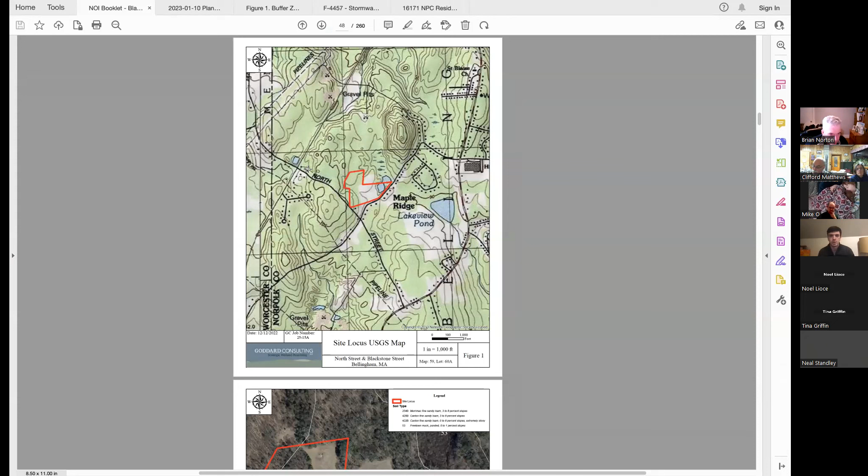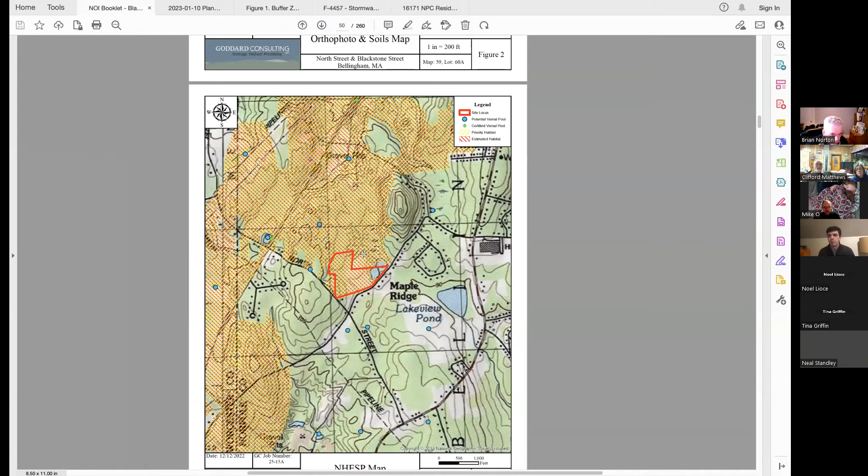Okay, can everybody see this okay? We can. All right, perfect. So just a little background: this is a locus map of the area. Blackstone Street here and North Street going this way. You can see on this ortho photo that a majority of the land, or approximately half, is agricultural land, and another portion is forested. Over in this eastern corner there's a BVW wetland. And as stated before, the whole site, or majority of the site, is located in priority and estimated habitat for rare species.

So I'll go to the plan set here. Let me just go up a few pages to the title. So this is the whole plan set. The plan is for the site to be split into two lots. As you can see, there's this southern lot, lot 1, where the development will take place, and then this northern piece comes over and covers this wetland as well, which is about 12.6 acres. That's going to be a conservation restriction as part of the conservation management permit for the rare species. If I'm not mistaken, in the previous project a couple years ago, when this was proposed as 4 single-family homes, this commission agreed to hold that CR. From my conversations with your administrator, the commission is still willing to hold the conservation restriction on this property. I believe that is correct. All right, perfect.

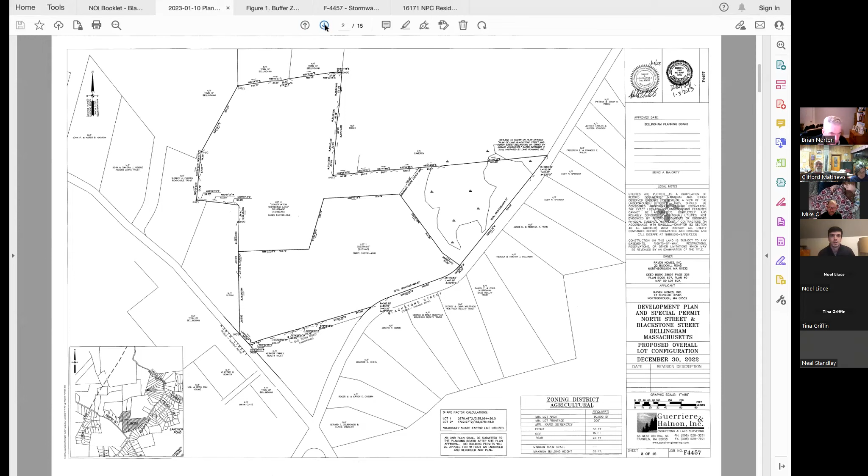So I'll go down a little bit. As you can see here, the dashed line going around the property is the limit of work. This will also be the turtle barrier fence as part of the turtle protection plan to protect the eastern box turtle located in this area.

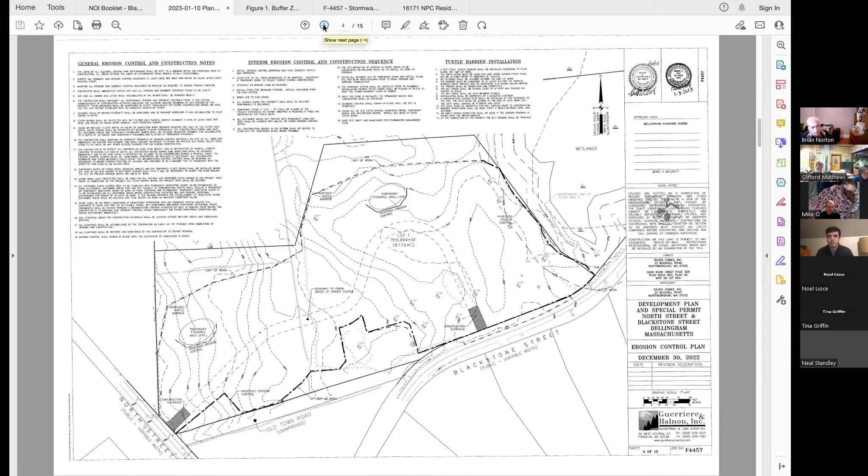That's a requirement from Natural Heritage and part of the CMP. Here we can see the general layout of the site. There's a roadway from Blackstone Street that goes through the site and connects to North Street, and you can see the 12 3-unit townhomes.

To the eastern portion are the stormwater infiltration basins, which is why we're before you tonight. Portions of the stormwater infiltration basins are within the 100-foot buffer zone to the BVW, and that's the only portion of this site work within the jurisdiction of the Concom. Here we can also see the shared septic system plan, with the leaching fields and reserve fields here.

Are there any questions so far, or should I just keep going and leave questions to the end? No, if you would just continue with the presentation. Yep, sure thing. We understand this is a first cut, and we understand it'll be peer reviewed. But once you've completed the presentation, we'll give you a little direction for future review. Yep, so please continue.

This is just the utility layout showing the water lines. The plan does propose to connect to city water, gas, and electric, and you can see the drain layout there. Keep going.

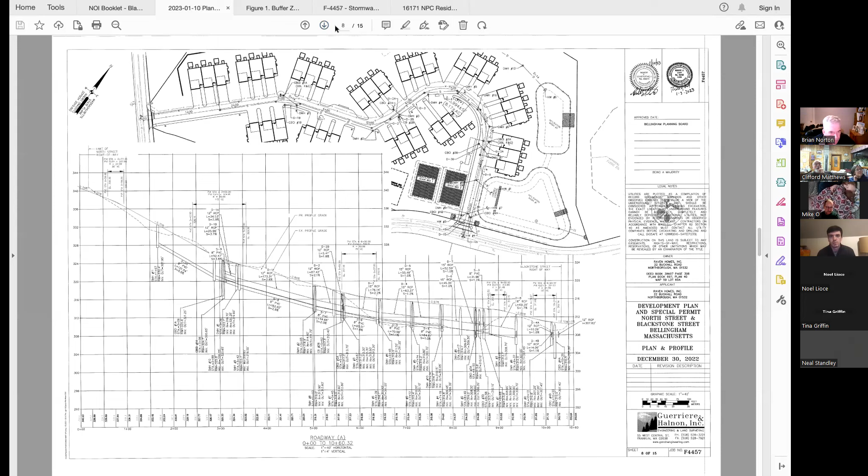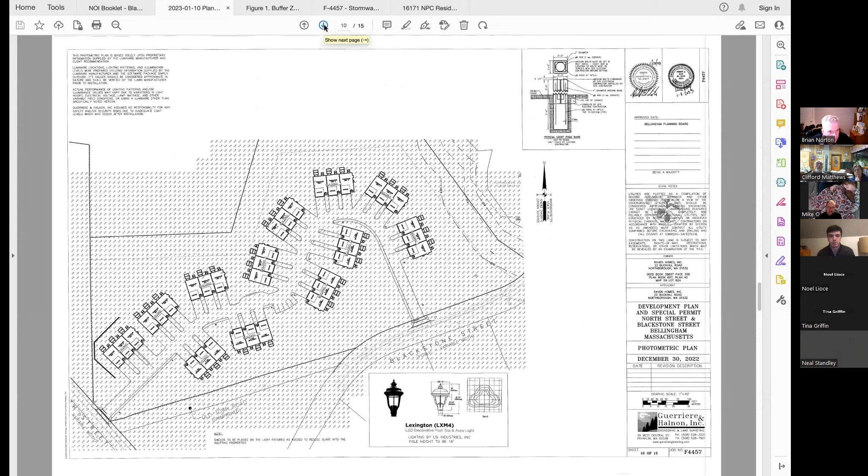This is a lighting diagram. I know you had just mentioned something about that - this may be more of a planning board issue.

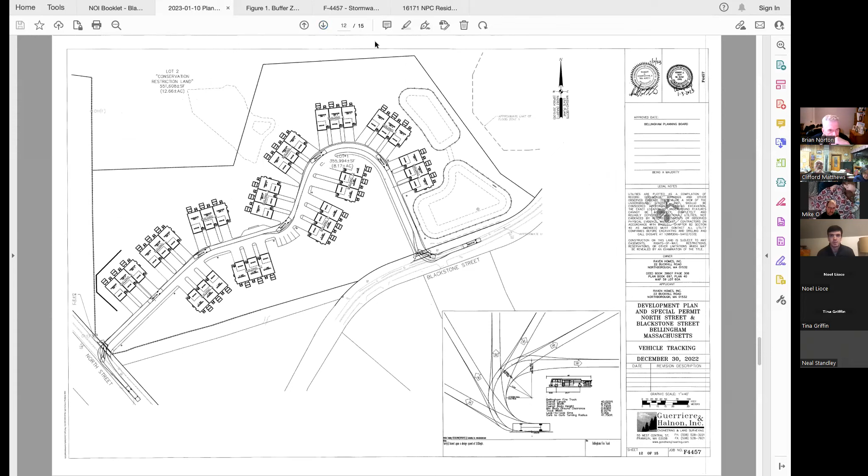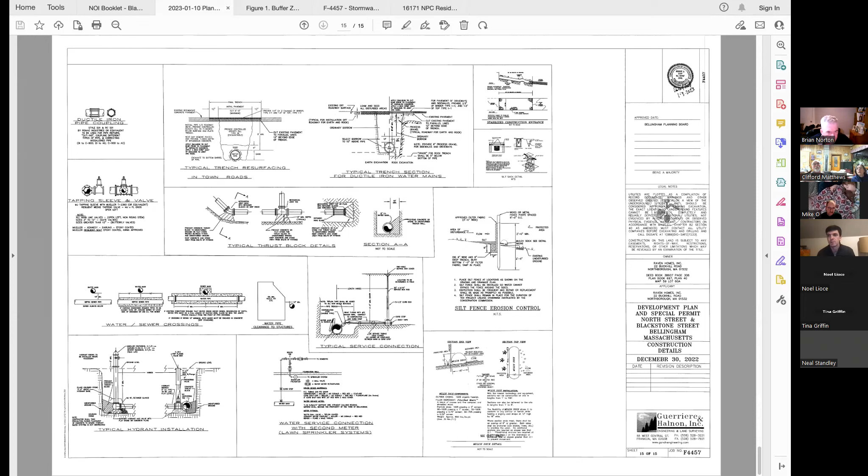These are just more details, test pit data for the leaching fields and infiltration basins. I wanted to quickly point out the erosion control measures we're proposing: silt fence, as I mentioned, for both erosion control and the turtle barrier fence, along with a filter mitt that will be installed, and silt sacks in all the catch basins around.

That's pretty much it. I'll leave that there, and any questions about any of that, I'd be happy to answer.

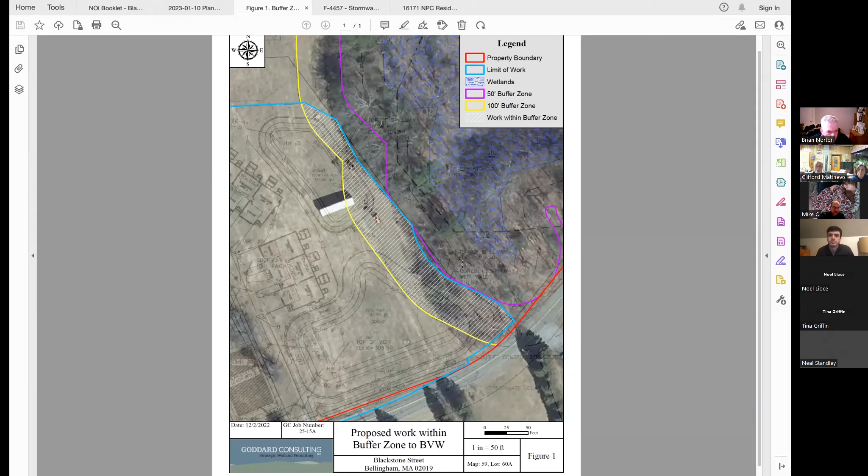Sure, because this is a preliminary discussion, what I'd like to do is present some direction from the commission moving forward for things we'll be looking for in subsequent review. Obviously we're going to put this out to peer review, especially for the engineering aspects. Normally what we do is run our peer reviews concurrent with the planning board - it saves time, effort, and expense having that type of review. So a couple of things we've noticed here that we'd like you to address in subsequent hearings.

We're going to need field shot grades, not assumed grades. You noticed on one of the plans there was a note directing the contractor doing the construction to notify the engineer in the event the grades didn't match. We are going to require field shot grades for the work - that's the first thing.

We want to make sure that, and the commission hasn't thoroughly reviewed the drainage calcs, but we need to make sure that the criteria for the local regulations for stormwater are met. That includes modeling for up to the 25-year storm under frozen ground conditions, utilizing the Cornell rainfall method, no increase in volume for the 25-year storm, and 100-year storm 1-foot freeboard.

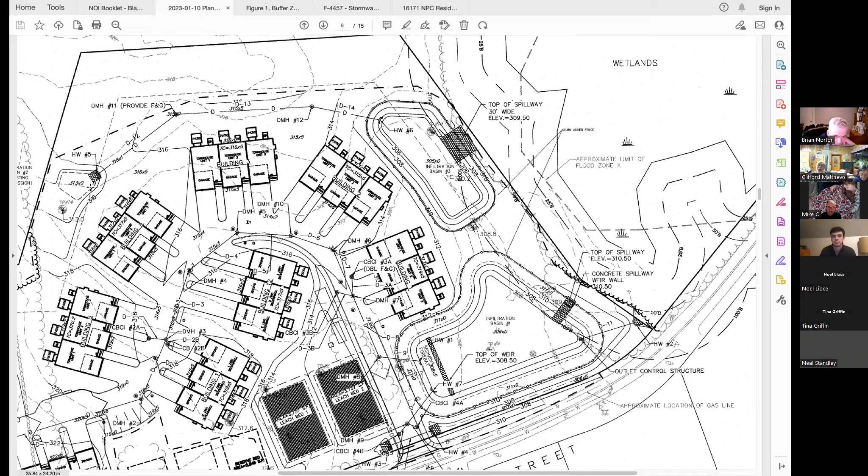We noticed that the soil tests were not witnessed. If you have that information, please provide that. We didn't see it in the plans.

We noticed that in one of the detention basins, it's difficult without field shot grades, but it appeared you have the bare minimum of separation to groundwater, and it appears that portions of the basins are built above grade. That's a planning board issue. I know that they're trying to have all of their stormwater management structures constructed below grade, and we'll leave that to them.

The last issue we had was we would really like to conduct the site visit. In order to do that, we would need you to stake the locations of the stormwater management structures that are most proximate to the resource area, along with the 100-foot buffer zone. It's a relatively simple exercise.

From our perspective, it's as you stated, Ryan, it's a buffer zone project. So if the wetland flags are still in position, the 100-foot buffer zone and the nearest point of intersection for the basins - are the wetland flags still up, Ryan? I do not know, I would have to go and check. I'm not completely sure.

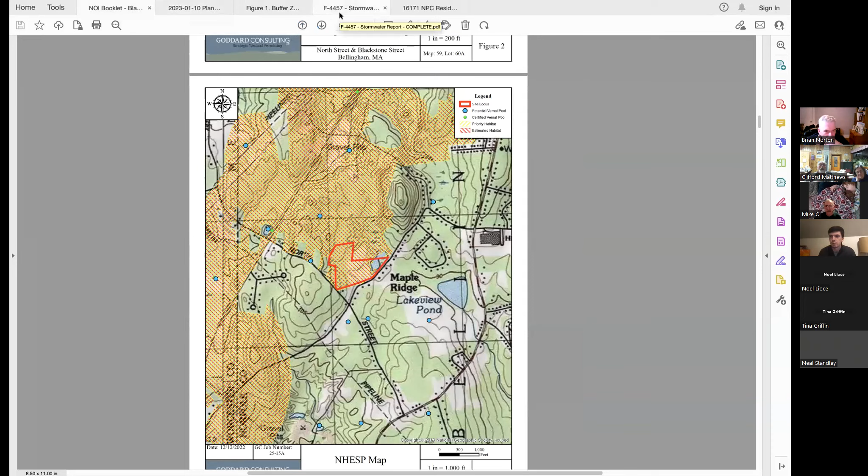EIR, is that what you're talking about? EIR, maybe EIR. Okay, so I can quickly go through this. This project previously had to go through MEPA and get an ENF certificate. And since the project scope had changed, we had to file a notice of project change with the MEPA office, and so we did that. So here you can see we just got a letter back at the end of January from the MEPA office.

Okay, and I know a lot of people observing this have no clue what those abbreviations mean, so you might want to say what EIR and MEPA stand for. Yep, so the EIR is an Environmental Impact Report, and MEPA is the Massachusetts Environmental Policy Act. So if a project rises to a certain level, they determine it needs an environmental impact report to determine what kind of impacts the project will have on the environment - water, climate change, air quality, and so on.

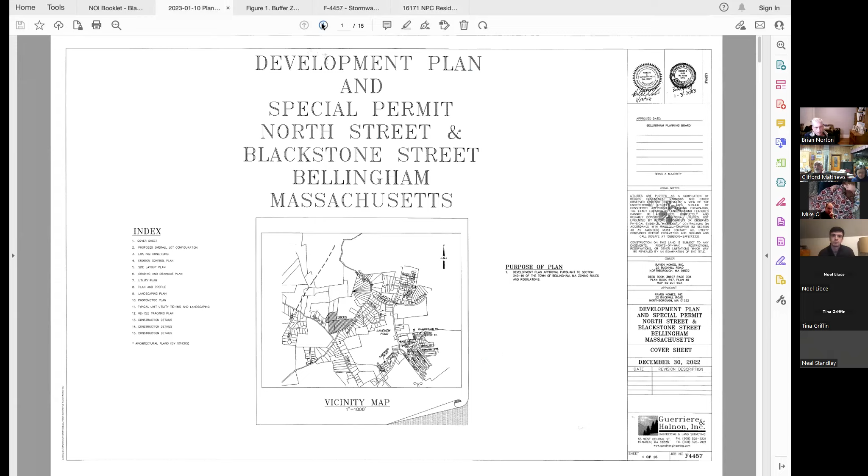Okay, what's the disposition of the peer review? Have we developed a scope yet? No.

Okay, well, I think the applicant is going in front of the planning board tomorrow evening. Is that correct, Ryan? I believe that is correct. I think Amanda can confirm that. But as far as I know, yes. Yes, we are scheduled to be in front of planning tomorrow night. So that's probably when, because the bulk of this review will be under their purview. They'll probably instigate the commencement of the peer review process.

Okay, now I know a couple of people have contacted the administrator and requested an opportunity to speak. We will allow that, keeping in mind that we run a pretty tight schedule. We have quite a number of hearings tonight, and typically our hearings run about a half hour, so we're getting up against that deadline. So is there someone who would like to ask questions or to speak?

Hi, I was raising my hand and then I realized there's probably a lot of us and you can't see me. No, but we see you. You'll have to forgive me.

I'm stuck in my son's room, and yes, that's a giant dinosaur over my head, but I'll be nice and succinct. Hi, everyone. I'm Katie Mason.

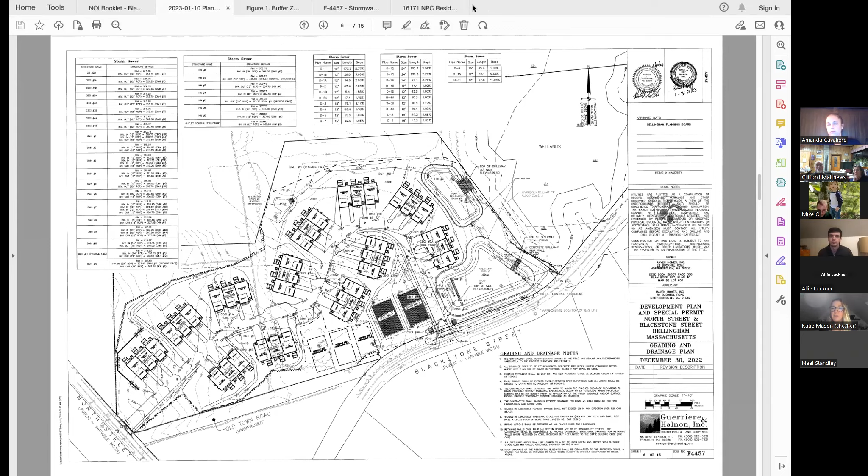May I, Mr. Matthews, may I share my screen? Okay, please. So what I'm going to show you, Conservation Commission, this is no new news to you, but to the people on the call, it may be.

This area in Bellingham is about 240 acres of rare and endangered core species habitat. It's been incredibly important in my family our entire life, and unfortunately is being brought to light in this manner that, you know, it feels like it's becoming encroached upon. And I know the Conservation Commission works so hard to protect every aspect of this, so I just want to acknowledge that and thank you for everything that you guys do. You do so much work.

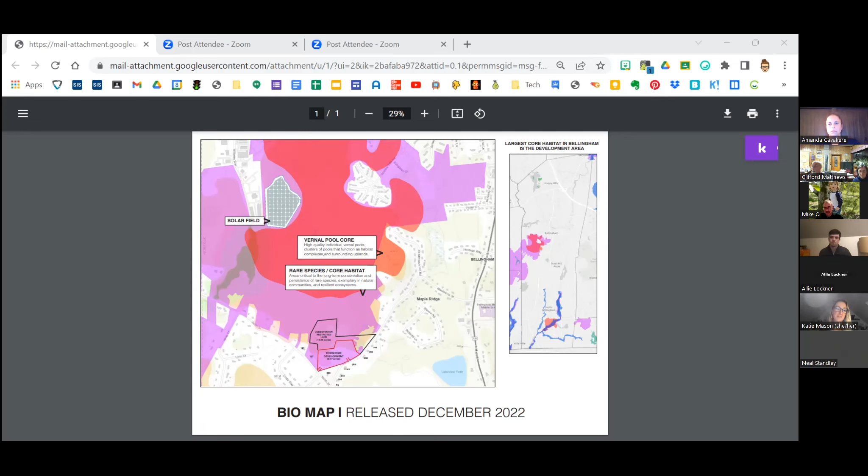Any other questions?

Hi, my name's Erica Giovanello, and my father, George Wolf, and our family also has lived right across the street, 268 Blackstone Street, from this proposed development. I just want to add one thing. Thank you all for what you've presented. Katie, thank you. And thank you to this board for all that you're doing.

But someone had mentioned that little pool that runs off of the street. We live right across from that little pool, and I'm here to tell you, I've been skating on that for over 50 years in the winter months. And that's without any pavement there. So that little pool is a large portion of that front field, if you will.

We know the area that you're talking about, and we may have met you when we were reviewing the wetland line for the 4-lot subdivision. I'm not sure—we met two people who lived across the street. Oh, that might have been us. It might have been, okay.

So we have seen the road does pitch in the direction of the field in that location, and that's something I think that will have to be addressed. Ryan, this is an opportunity to pass that along to your engineering team, because I'm sure you're not going to want pooling water near the entrance, since that's fairly close to it. So there's, I'm sure, a strategy to accommodate that water—change the road, or accept that water into your stormwater management system. But that's a valid point, and I'm sure nobody on the development team wants to see that happening post-development, because water will be running onto their property.

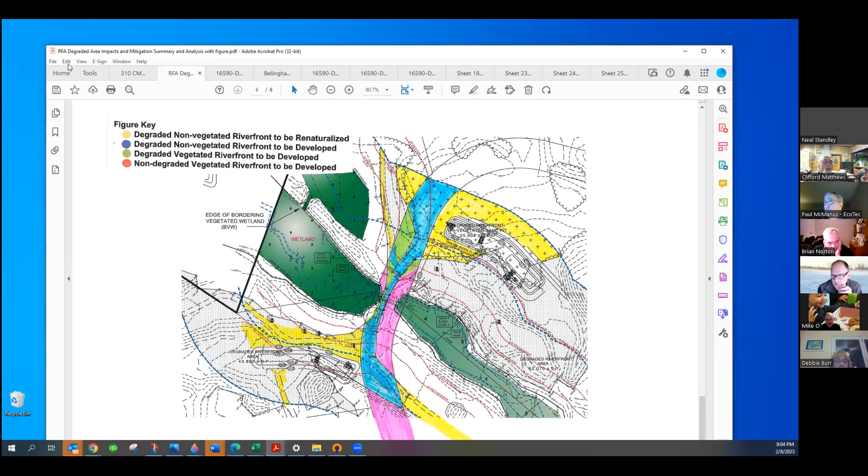I guess not. All right, well, we'll go by color, I guess. There. Can you enlarge it a little? Let me see. View. Do you have tools there? Yeah, I do. Okay, oh no, that's not going to help us. Collect payments—that was good. Well, yeah, I can. No, I'm afraid that'll mark it up. Yeah, it will make it confusing.

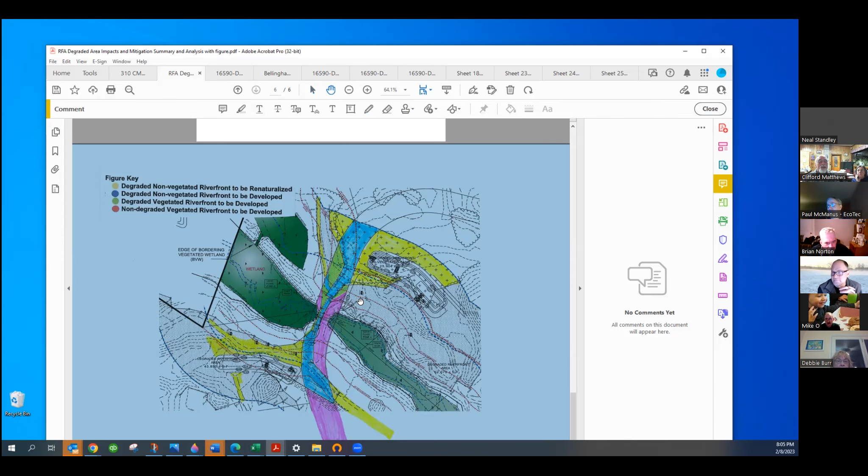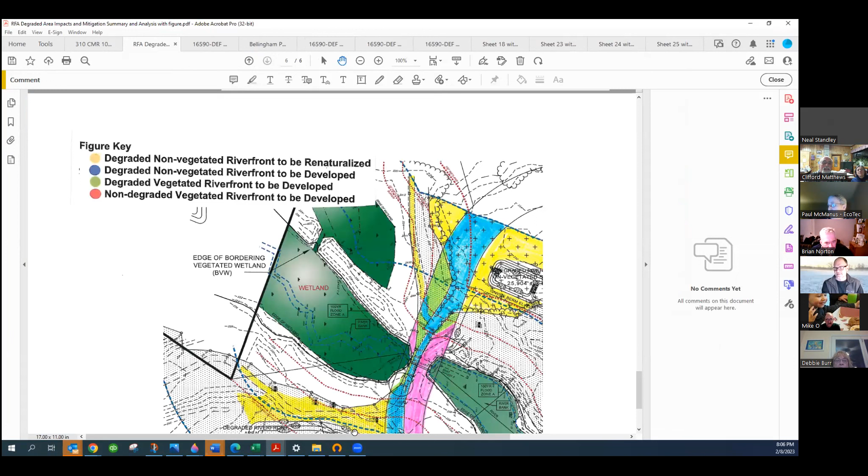Well, all right, I'm sorry. If you select the pan, the hand, and then just pan around but don't click on anything, you'll at least have the hand, I believe. Oh, okay, oh hey, thank you, Neal, that's helpful. And if you could just enlarge it a little bit. Yeah, that I can do. Thanks for giving us a hand, Neal. Okay. I think if you click off site, the blue will go away. There you go, perfect. All right, so let me.

Okay, so now that you derailed the discussion, Mr. Chairman. I know it, I'm sorry. I'm so sorry, Paul. I was having a hard time, Paul. I'm like, I know where he's talking about.

I don't see. Okay, so the point I was making with my cursor here is that the riverfront boundaries represent, in this case, there was some early discussion. I had contemplated tightening up the mean annual high water. We went through that issue. The mean annual high water is this line out here, so it's the, I'll call it, the less conservative version.

So just to be clear, what we have here is a degraded riverfront as reviewed by Ethan from BSC. And then I've broken that into two subsets, basically the yellow. The yellow is areas that I'm proposing to renaturalize, which are the unvegetated degraded areas. I'm distinguishing that from, for example, this big area here, which we identified as degraded, but that's the area with the pines. So I'm splitting the degraded into those two categories.

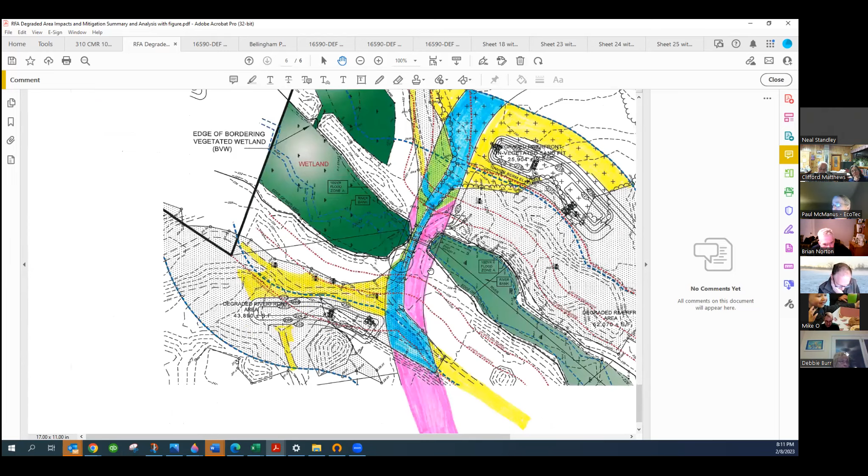2-to-1. And even if you were to consider the degraded vegetated riverfront as non-degraded, we're still well in excess of the required one-to-one ratio required under the regs.

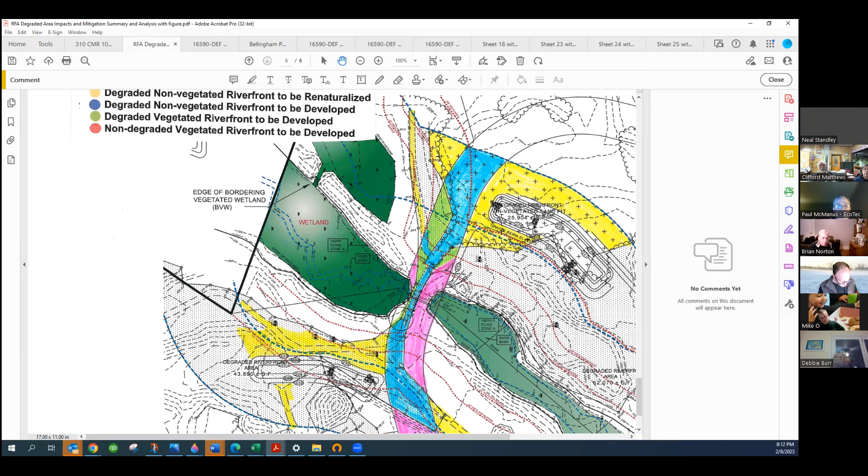So this really brings us to what Rob and I were talking about earlier. What seems to us to be two threshold questions we're really looking at from the commission. The first is, I know the basins in the inner riparian was an important issue to the commission. So with the basins outside the inner riparian, as I said, these are sketched here, and Rob can talk about his level of confidence in terms of being able to get these designs to work. He's confident he can get them to at least mostly work, but hasn't frankly invested the substantial time in redoing that.

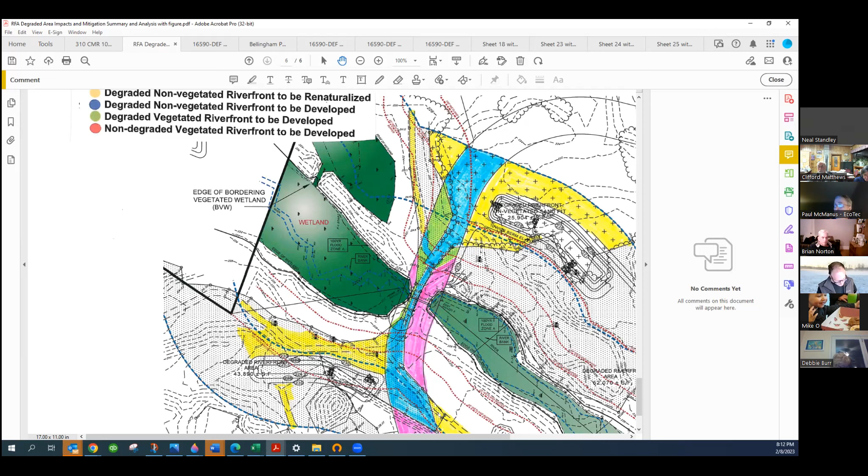But based upon that presumption, and obviously it would require your peer review, his formal detailed design and your peer review evaluating conformance with the stormwater regs. But as a threshold question, would the commission be in a position to approve this preferred alternative as the crossing?

And again, I use that term preferred alternative, which is a term under the 1058-4 provision, and we're operating under 1058-5, which is really the second kind of threshold question in my view. I know that your consultant had, at least initially, I don't want to put words in his mouth, but I'll say questioned whether the riverfront alternative, whether the riverfront work should be parsed into two different sections. In other words, review part of it under 1058-4 and part of it under 1058-5.

Based on my experience, reading the cases, and my personal experience going through this, I'm quite confident that it's appropriate, when there's degraded riverfront, to operate under 1058-5, which is where we are here.

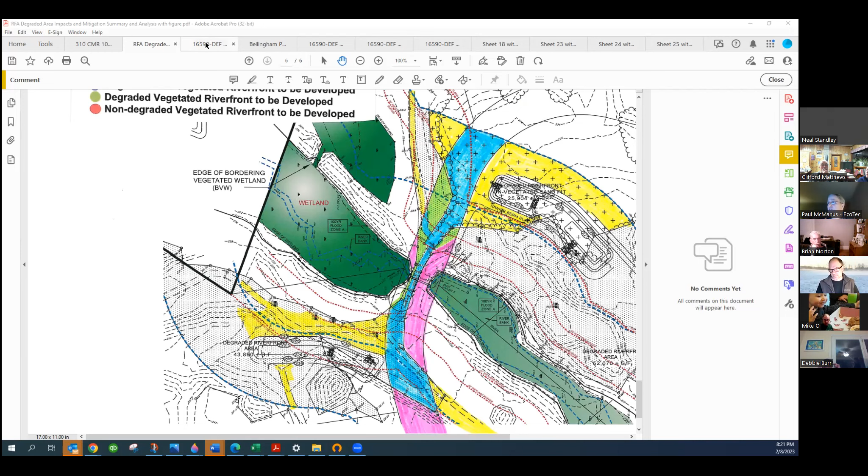This is a broader view. So basically, we're talking about developing up this area up here. Right, that's the goal. And the question obviously is how to get there.

In terms of your question, there is more property to the south, which would be the left in this image, but this up here is not part of the property. So the only ways at all to get here would be to use this existing crossing, or as we've discussed, to squeeze in around here and do this alternative.

That's the area I was thinking about, Paul. Oh, okay, so I guess I misunderstood. No, that's okay. We've already talked about the frontage on Lake Street, and how it's been subdivided, and moving forward those lots may not qualify as limited project. If I remember correctly, it may have been Rob who said, well, that's okay, we'll take our chances with that. So I think we've put that issue to bed.

What I'm looking at here is, if we say okay fine, you get your preferred crossing, and the commission was looking at alternative 4, which is the one to the north. So if he's going to build a roadway in there to develop that in some other manner, then the impacts associated with that should be considered as part of the equation for balancing whether or not the crossing is necessary. In other words, Paul, if he's going to build a road back there, it makes sense to me to just continue the road and not have the crossing.

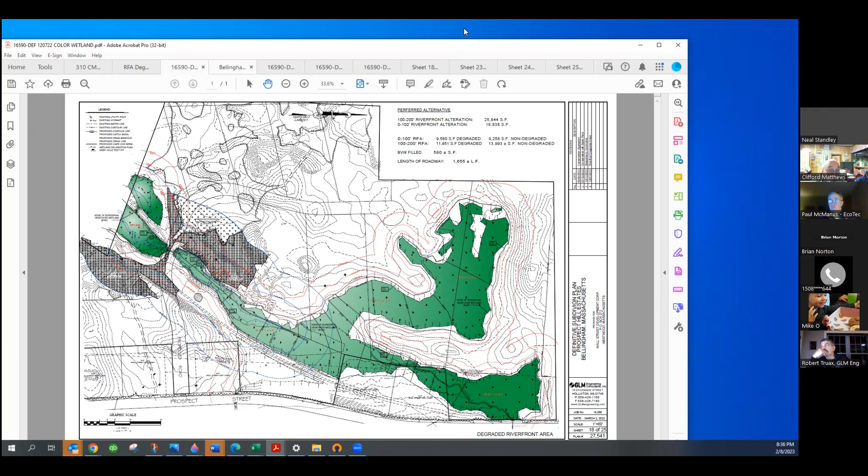They really haven't had a lot of planning board review, Mike. There have been a lot of continuations, and I suspect the planning board is trying to determine what we feel is going to be permittable from our perspective before they conduct any review. The applicant has requested multiple continuations, so we're doing our work so we're going to be looking at the same plan. But we have two more hearings to go, and so I got this on my screen, let's take a real quick look at that.

I know. I'm going to apologize though. I can't rotate it, I don't know why. I put a new Adobe on my computer and I'm not really good at using it.

That's all right, you have to be in edit mode I think. So can you see this? Can you see the whole site now? Yeah. Are we seeing this? Yes, yes. All right, so this is the area to the south.

I'm going to zoom in on it so you can see the resource areas that are over there. So this is the river, this shaded area right here. That's the 200-foot river buffer.

There's another one too, Rob, another on the point. This backside is the same river we've been talking about all along. This is the other end of it down the south here, so this is the 200 on the other side. So this unshaded area in the middle here is the only area that's not in the 200.

And then this is wetlands. You have a wetland here, you have buffers around it, you have more wetlands up here, you have a vernal pool up - these two, I believe, are vernal pools up in this area. I think we have a couple vernal pools. Yeah, I think there were actually 3. Right, yeah, something like that.

So I think the comment was like this lot 15, here we show it as an A&R, you can't get to it through here, and we would never be able to. Right, I think, well, the idea when he was doing the project was to include all the property. The main reason was to freeze zoning on everything, that was one of the reasons, as well as develop the main piece.

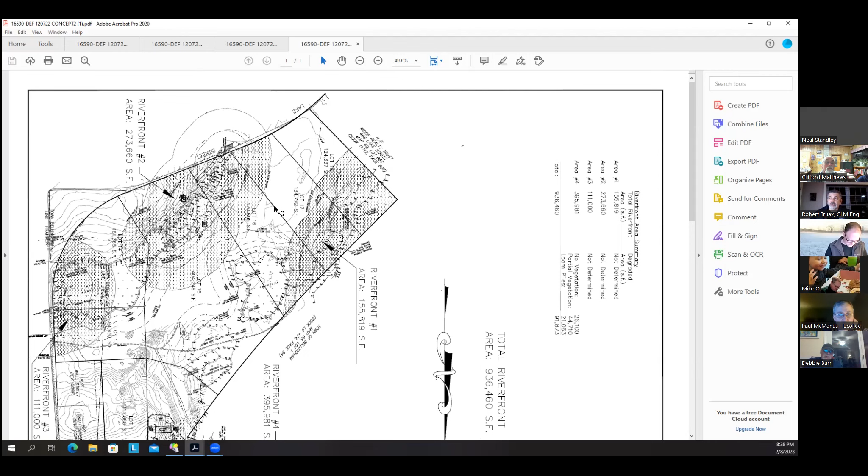This area is a lot lower, as you can see, these are contours. There's not a lot of difference between the elevations here and the elevations in this wetland - not a lot of rise in this upland area from the wetland area, so it's not real desirable land. The desirable portion of this piece is that backland where they did the gravel removal, because it's all sand and gravel, and we don't have water table issues back there like we have up here.

So Mike, we had this discussion like one of the very first hearings. Correct. And we came to the understanding that these lots, once the permit's issued, these are the lots, and there's no way that they'll qualify as limited projects. Correct, and we'll put language in the order of conditions if it makes the commission feel better, saying that on the transfer of the property, that they will not qualify for the limited project because they were subdivided this way with this knowledge.

Yeah, we would agree with that, Mr. Chairman. I tell my clients, you can't win with a created hardship. That's exactly correct, that's the thing - that's the term that I use, a created hardship. Yeah, we were in agreement from day one with you, Mr. Chairman, on that.

Absolutely. So Mike, what we really need to do now is wrap this up. We have 2 more hearings, and we're late on those. What I'm going to ask you to do - first thing we need to do - we have submitted, and we have received notification that the peer review funds are just about out.

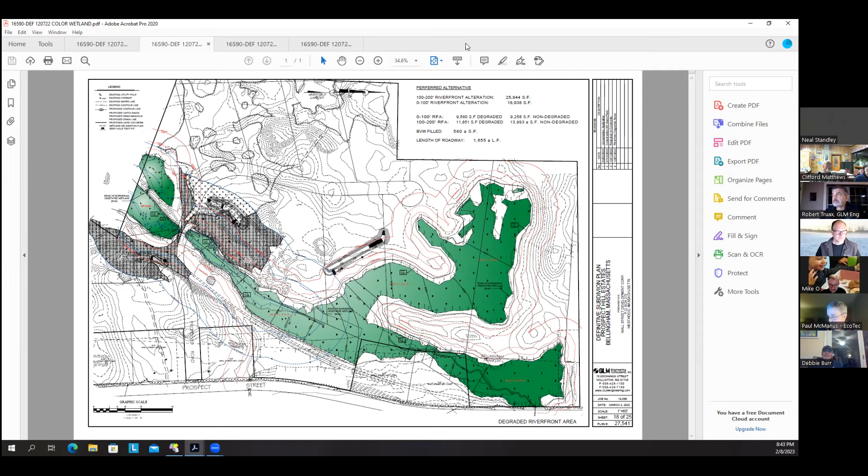So this is something the commission needs to consider carefully. I'm going to ask everyone to think about this, and to provide any questions they may have so the administrator can get the answers from the applicant. At our next hearing, we're going to need to provide the applicant the direction that they seek. So, ladies and gentlemen, you have homework to do, and obviously we can't discuss it with more than just a member and the administrator. She can provide or will obtain any information you need to make your decision, but we need to do that at our next hearing.

Mr. Chair, just to make sure I'm understanding this: so we're being asked to make a decision on whether this project is permittable in our opinions individually, without having gone through the whole application process, meaning peer review, engineering, water, stormwater -- correct?

Well, what we're asking for is that high level assessment, clearly with the understanding that it would be required to meet the stormwater standards and everything that goes along with that. That's the 'can' part. We're asking for the 'may' part, and both positives in both categories are required. But if the 'may' is no, then it doesn't matter whether we can or can't meet the technical criteria.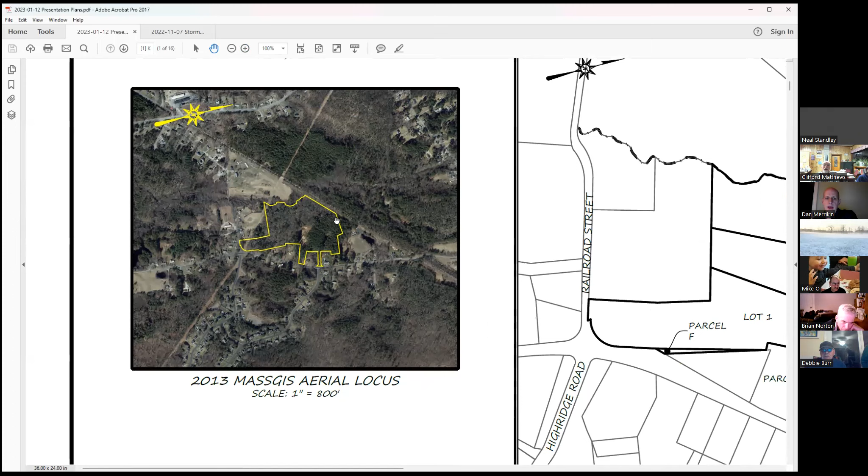This is a piece of property between 336 and 340 Lake Street. It's 9.7 acres of land here. Basically, everything you see off to the left is wetlands and a river. We're not proposing to do any work there. The right half of the property is where we're proposing a single family subdivision.

Is everybody familiar with where this is? Kind of across the street from High Ridge Road - this is High Ridge here. So Peters River is one of the property boundaries here on the west side. Obviously, there's bank, riverfront area, land underwater, bordering land subject to flooding, all associated with Peters River. We're not doing any work within any of those jurisdictional areas. We're proposing to do work kind of in the central portions of the site.

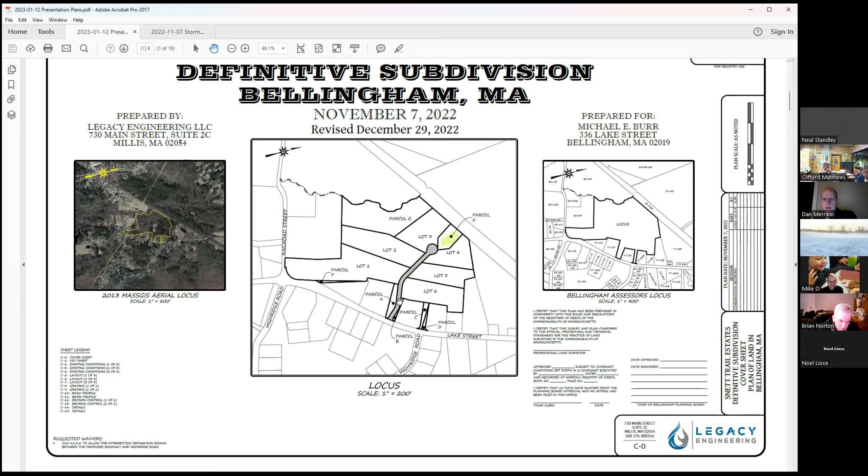And those central portions of the site look like this. So we have two areas that come out to Lake Street. This one over here to the north was clearly left as a road option - it has the corner roundings, it has everything. It's almost across the street from High Ridge Road, but it has wetland areas. So obviously we did not elect to use that as a proposed roadway entrance for the site because that would have more adverse impacts than what we're proposing to do.

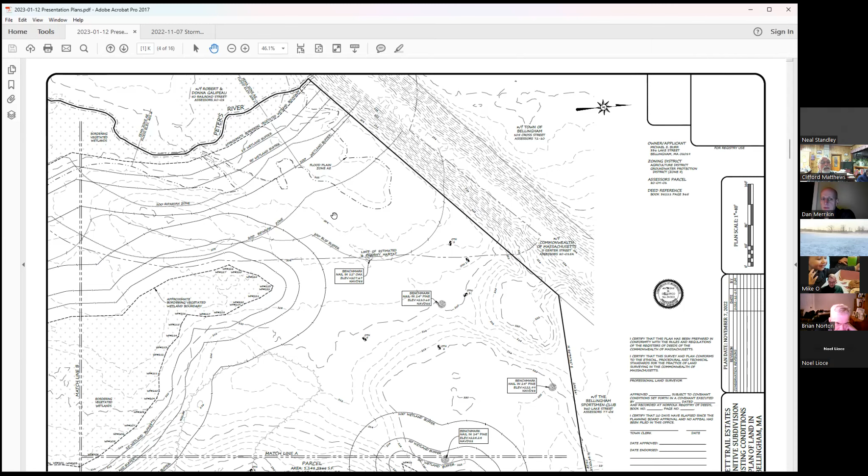What we're proposing to do is use this frontage onto Lake Street, where we have a small IVW to the left, and then offsite to the right is a BVW. And in the back of the property, as I indicated, there's a bordering vegetated wetland that runs along the south side. We have Peters River, we have the wetland associated with that, we have the riverfront area associated with that, we have bordering land subject to flooding, which we delineated based on topography. We're not doing any work within 400 feet of Peters River, and we're not doing any work within 100 feet of the land subject to flooding. So those areas, although they're resource areas on our property, are not really impacted in any way.

What we are proposing to do here is to build a road.

This application is for the road only. We don't have enough information on our lot developments at this point to present anything specific. We do show a general development scenario for each lot so that when we do our stormwater design and analysis, we have a basis for that.

But we will be coming back to you for any lots that involve work in the buffer zone. So this application is basically for the subdivision road. You can see we've proposed to bring it in between the IVW and the BVW offsite, and we've worked our way around the isolated wetlands, so there's no work proposed in the 25-foot buffer zone.

The total work in the buffer zone between these two areas is 16,915 square feet. That's from this line, the buffer zone, down towards Lake Street, and this part of the road will be in the buffer zone. 4,210 square feet of that is between the 25 and the 50, and the rest is between the 50 and the 100. We have no stormwater discharges in this area.

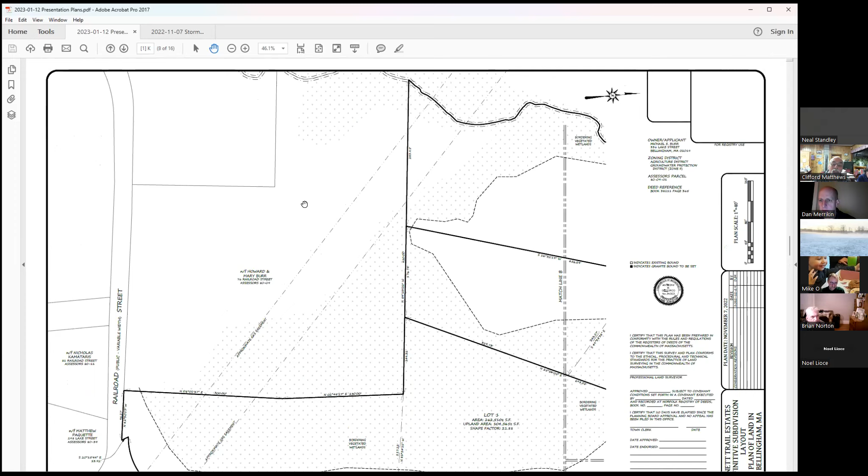On sheet C5, okay, now I'm seeing a slope easement there, and it looked like the slope easement is 12 feet from the isolated vegetative wetland itself. That's just an easement that allows - for example, if the normal progress is you build the road to binder course and then start building houses, you might end up conveying a house lot before you finish the road. So the purpose of the slope easement is just to give the developer continued rights to finish any side sloping areas that they need to finish.

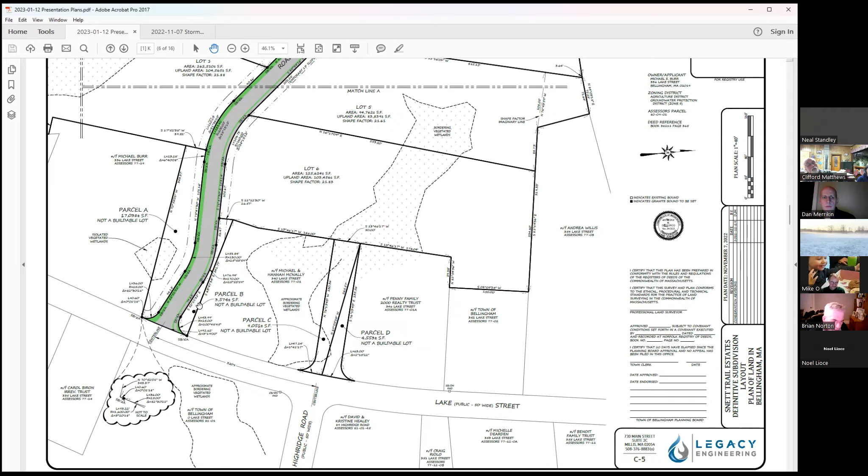It's not a definition of limit of work. The limit of work would be what you approve on this plan, and that's what we have shown on sheet C8.

Right, okay, that's the one I was going to look at, and as you mentioned, you're right outside or right at the 25-foot no disturb zone. So when we go out there, that's one of the areas we'll pay attention to.

You did show submitted photographs. I didn't see any looking to the south. I saw the photographs looking to the north, but we'll take a look at that.

We also saw the 4,200 square feet of alteration to the 25 to 50 zone, and because that's a limited disturbance zone, at some point somewhere else on the site we'll ask for some buffer zone enhancement. Maybe there are some open areas, maybe toward the back where we could do some supplemental plantings. We can take a look at that when we go out.

Obviously, we're going to go out and take a look at the resource areas. You're staying well away from the river. Are your wetland flags still up? Yes, they are. Okay, so we'll go out and look at the flagged resource areas. If I'm not mistaken, it's pretty dense around the Peters River in that area.

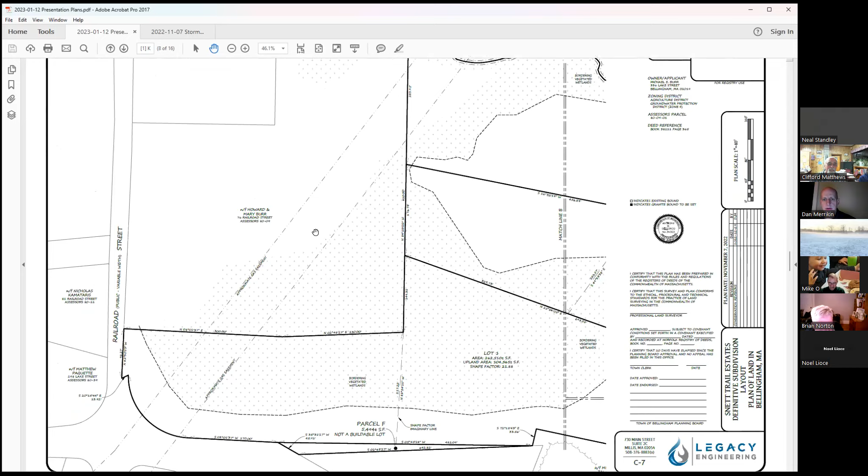Yeah, if you go back here, there's a cart path. You see this contour right here? Yes, I do. There's an old cart path that kind of tracks right through here, so you can walk out. Convenient. And there's actually a bridge over the river there, I believe.

So when you flag the wetland areas, did you also flag the mean annual high water mark? We are so far away from the river, we did not flag that. Given that we're 400 feet away from the river, we did not flag those resource areas. I understand.

So what we'll do is walk back, especially considering there's a cart path. Just to confirm, it appears that it would not be a problem for us, but again, it needs to be field verified.

I'm happy to join you if you want to let me know when you want to do that. We would like that. And I don't know if you availed yourself of some of the earlier happenings. We have a number of site walks to do, and if the flags are still up, we would like to be able to get this one done.

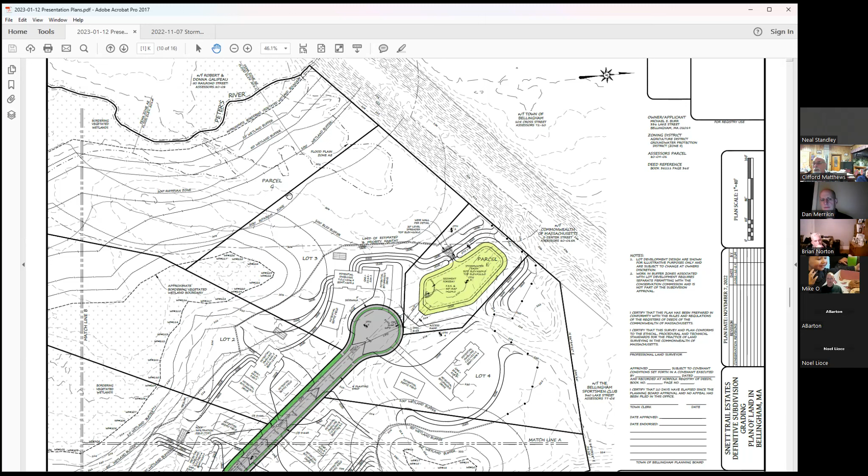It's going to have to be the 18th or the 25th. Noel can't make the 25th. No, Noel can make the 25th, but she can't make the 18th. Okay, Neal can't make the 25th. How many people can make the 18th? Because I was hoping to continue them to the 22nd so that we could go over the resource areas. I can make it.

And Ariane, for the 18th? Yeah, I can't make it, cannot make it. Okay, even with a wake-up call?

Mr. Chairman, if it matters, I'm not sure that I could make the 22nd meeting. I have two other meetings that evening. I certainly could make the 8th meeting, if that's enough.

Actually, you know what, it was March. I had it down for the March 22nd. Oh, okay, well I can make that. You know, because we wanted... because February 22nd is the same meeting date. And that will give us additional time to get out there.

Neal and Mike can make the 18th. Perhaps we could do 4:55 and then do this. That's what they want to do.

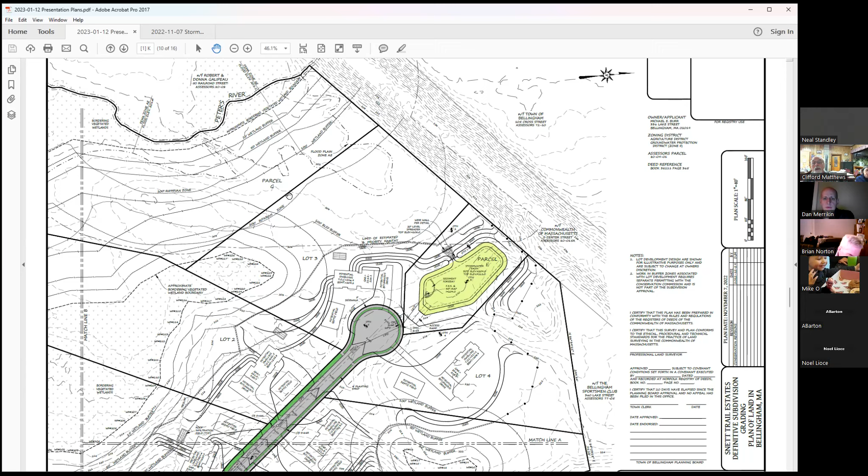How about the end of High Ridge Road? Right at Edgewise, walk across the street. Dan, does that make sense? You could actually park - you can come in and there's kind of a dirt driveway here to the left of the BVW. You can park in there if you'd like.

So we want to do this the 18th? Start at 8:30, up at 455, or? Yeah, we're gonna start on the 18th at 455, and I'm anticipating no more than a half hour there. So allowing for time - is that 8:30 in the morning?

Yeah. What, Dan, we'd be looking at what address, Mr. Chairman? 455 Hartford Avenue - that's next to Lakeview, I mean not Lakeview, Lake Street. No, the restaurant. What restaurant is it? Oh, Rosewood. Rosewood, thank you. Sure, we can park at the Rosewood - they're not open yet - and then we'll walk up into that one.

And so Dan will probably be there around 9:15ish. You're number 2 on the problem list. If you were number 3, it'd be plus or minus 40 minutes. That's February 18th, 2 weeks. That's correct, right, okay.

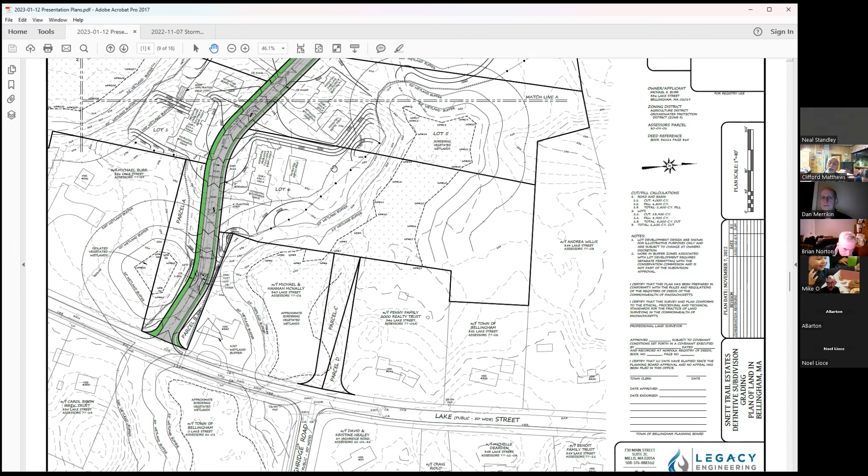I'll entertain a motion to continue the hearing to the evening of March 22nd at 7:30 and to conduct a site inspection on Saturday, February 18th, somewhere around 9:15. So moved. Second. Discussion? All in favor? Aye. Okay, that's a unanimous vote.

Thank you for your time, I appreciate it. Thank you, Dan. We'll look forward to meeting you in the field. Yeah, have a good night. You too, thanks. Thanks.

All right. So what we have remaining for site inspections - we're going to need to take a look at Blackstone and North, and we're going to need to get back out on the Hartford Avenue site.

And they're on for the 8th. And the 4th is MACC.

Matt, I don't think we're gonna need you to come out on the one we just did. Okay, I think we'll be okay on that one. Okay, that's fine. I think we were gonna have you come out for 455 though.

Yeah, if I'm coming out for 455, I probably ought to come along for - it's always good to have eyes on. Okay, if you want to come, you're welcome. But I work at your pleasure, so - does that work for you?